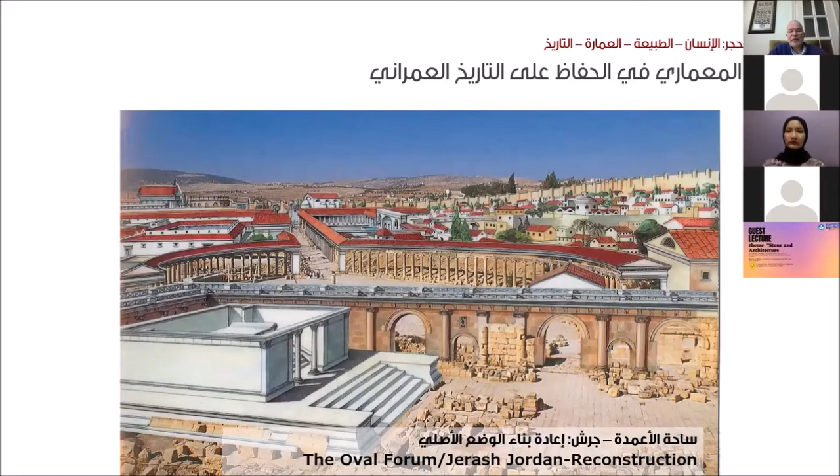Very important examples in our area also come from the Mamluk era, the Mamluk state, which is part of Islamic history. The Mamluks took much care in architecture and in stone architecture. They have very fine examples of architecture in Cairo, in Syria, and also in Jerusalem, the capital of Palestine. I'll show some examples.

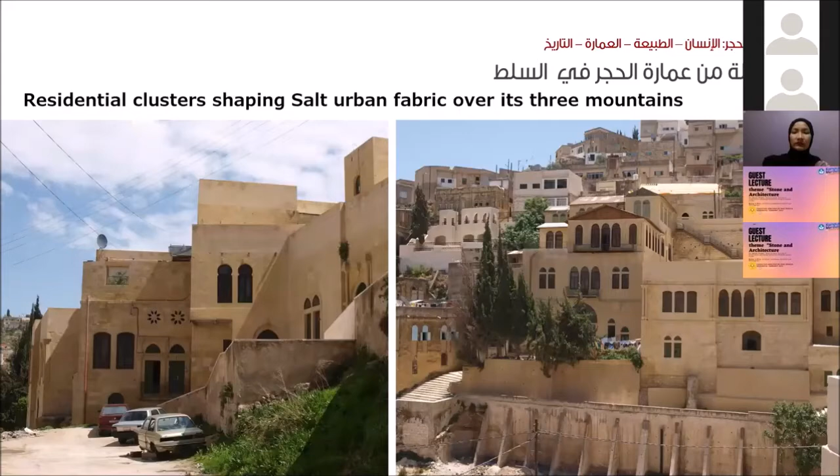Our company has the honor to make a major urban regeneration in the downtown of Salt. The photos that we are seeing are part of that. We have made some conservation efforts for residential complexes, and also, as we can see in some coming slides, there was an open urban plaza where all these complexes looked into. We have made an urban regeneration for that important space, and I will talk shortly about it.

We have another town in northern Jordan. It is Um al-Jimal, the mother of camels, if you want to translate it literally. It used rough details in basalt stone, but very creative.

They could, without of course any concrete or steel or any construction aids, make a span of about 5 to 6 meters with stone only, by putting boulders of stone each one over the other in a creative way, so they could make some cantilevers and some spans resting on arches without using any other elements. A whole town is still there and needs many renovation and conservation efforts, and it is so important.

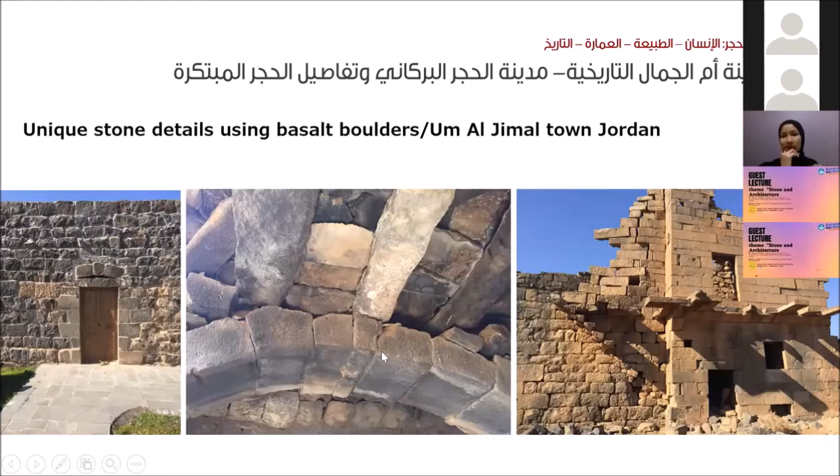In modern Jordan, we can see some photos from Amman, the capital of Jordan. We still, till now, are building with stone, but the techniques have changed drastically from history, because now stone is not the main structural element of the building. It is the cladding, the facing of the architecture, but the impression and the identity of architecture is still developing, stemming from the original concept of using stone.

And as you all know, because stone is part of the environment, it mixes with the greenery, it mixes with the topography, and it conveys the message of the place in a very human and very creative way. So using stone gave architecture in Jordan, and specifically in Amman, a very unique impression and a very beautiful and unified kind of identity. We can see some of the fine stone buildings in Amman.

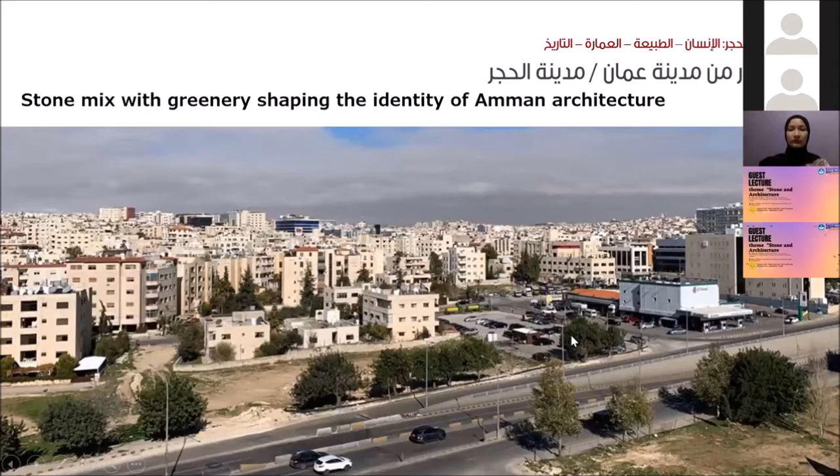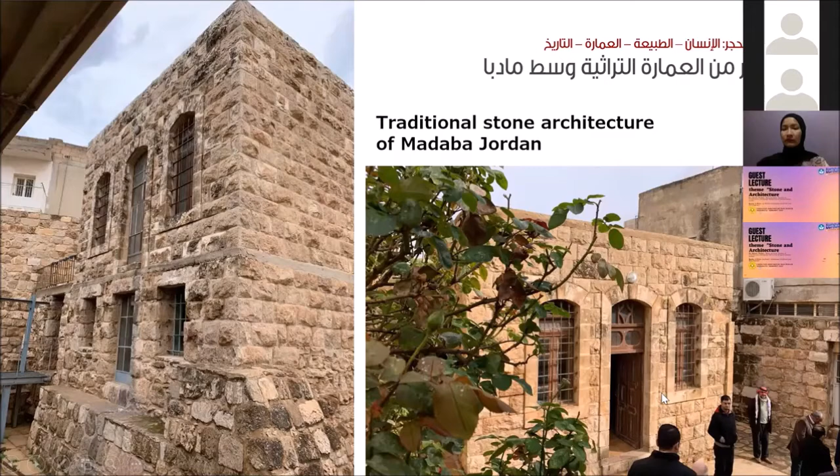Other towns in Jordan also, Madaba is an important city in the middle of Jordan. We have also fine examples of using stone. We have Irbid in the northern of Jordan also, with very fine examples. So anyone who is interested in stone, Jordan is an open museum to stone architecture and stone detailing. You are all welcome to visit Jordan, inshallah, in the near future.

Now, I will talk a little bit about some recent examples of dealing with stone. And after we have finished talking history, now we are talking about the contemporary stone heritage in Amman and Jordan in general.

I will give some examples from other architects and then end with the works that our company has done, and I was part of the team in these projects.

Now, one prominent architect in Jordan is Jafar Tukan. He died about seven years ago. He has very fine projects,

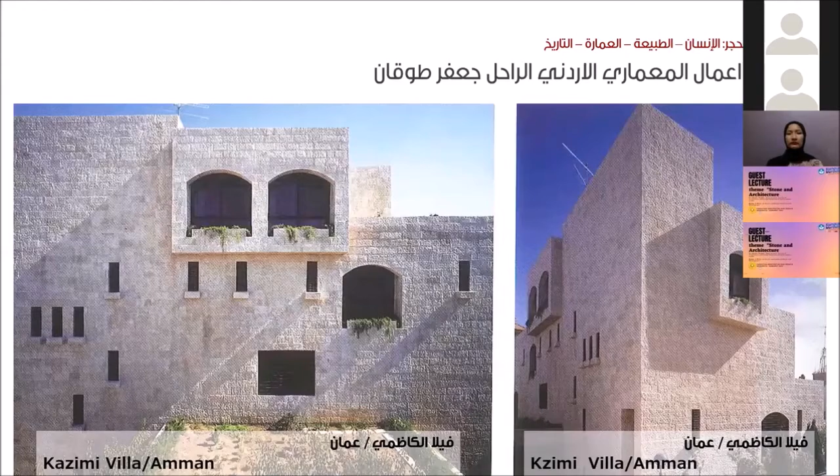Also the Kazimi villa, but from the back side. He has also made some public projects like the City Hall in Amman. As you can see, you have distinctive treatments of stone in each of these projects, and each detail would serve the concept in that project.

This stone comes from Ajloun, from northern Jordan, and he cuts the stone and leaves the natural face outside, so he can get this very nice color and very nice texture in contrast with the concrete elements that he is using for the beams. So as you can see, stone is very tough, but at the same time it is very flexible when it comes to the detail and when it comes to what you want to take out of it.

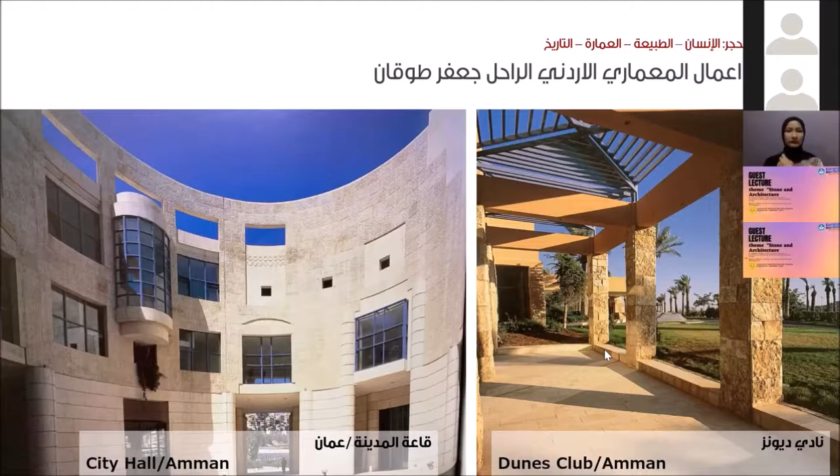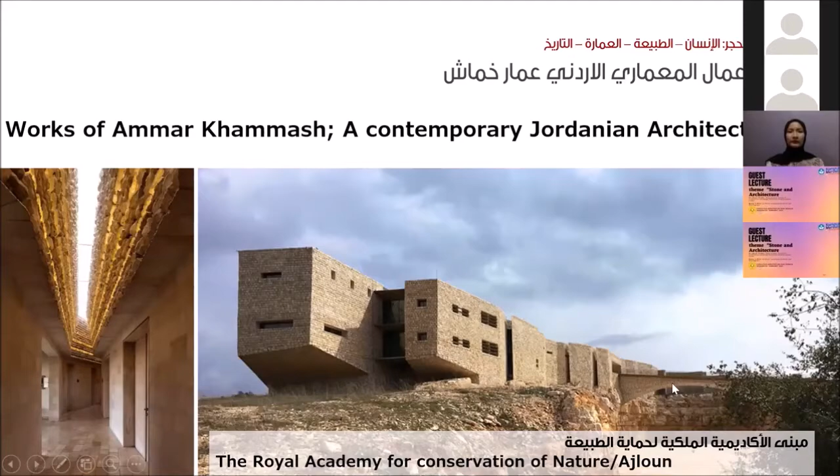But actually, it has very daring details, and he is fond of cantilevers and big spans using slim cross sections of concrete. This is the same, about 35 meters span on a concrete archway cladded with stone. By the way, the stone for this project was quarried from the site itself, an old stone mining site, and he collected all these stones from the same site.

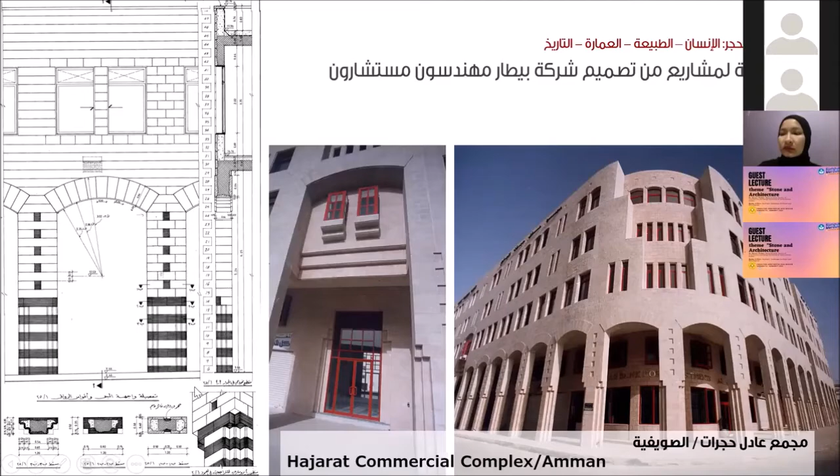These are some of the details that, some 30 years ago, I drew by hand before AutoCAD. This is the same building from inside. It also shows the modern interpretation of the tradition, the stone traditions, but in a modern way.

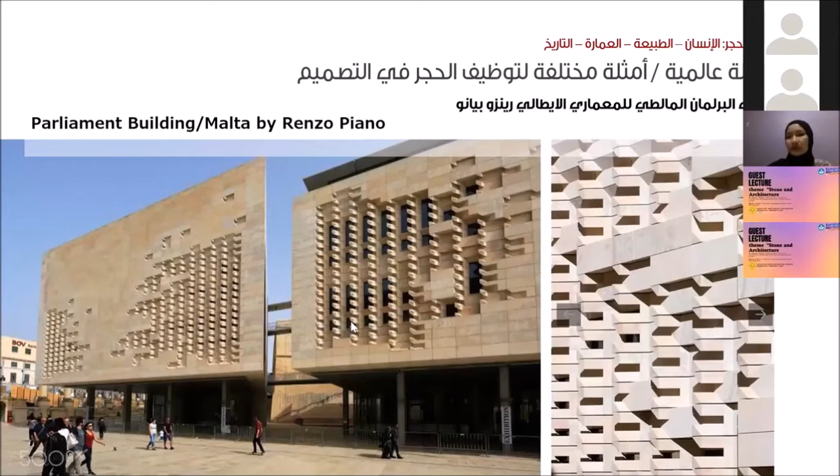An important architect, Renzo Piano, has also made very nice details with stone. This is the Parliament building in Malta by Renzo Piano.

I think we have maybe about 15 minutes. I will try to go more quickly from now on, because these are so specific to Jordan, and I just want to give you a very quick idea about how we deal with the stone.

Of course, the stones are generally of three origins or kinds: igneous rocks, of lava origin, and sedimentary rocks. They originate when the water comes out and the minerals settle, and most of our stones are of this kind. And there are metamorphic rocks, which result from changes in heat and pressure or fluid in the stone.

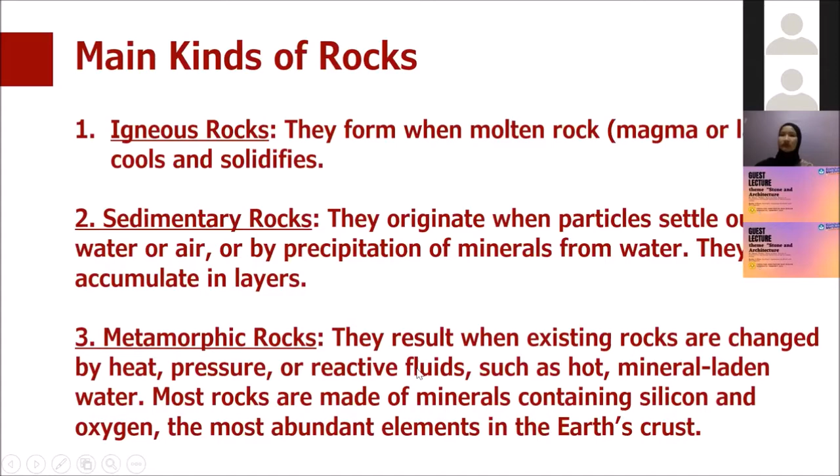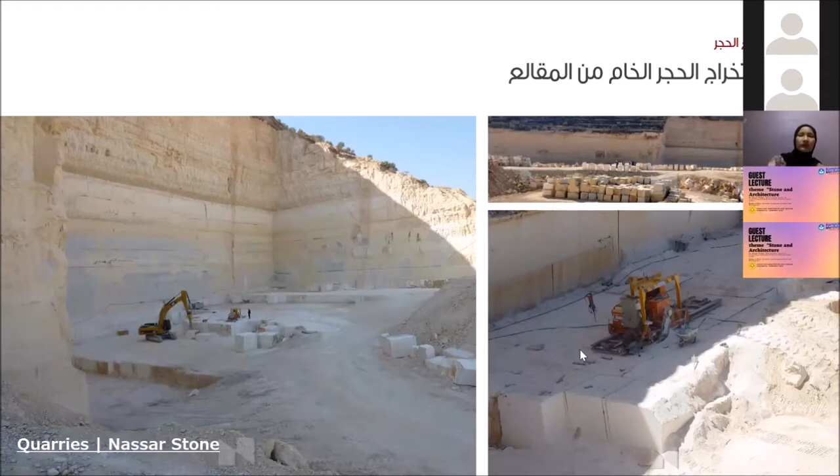I'll go through the mining of stone in different kinds. We have two main ways of mining. From the mining sites like this one, where you cut through the mountains or the grounds and get big boulders of stone. And the other kind is where they pick boulders from the desert, where you have boulders of stone that are scattered, and you pick them and you cut them.

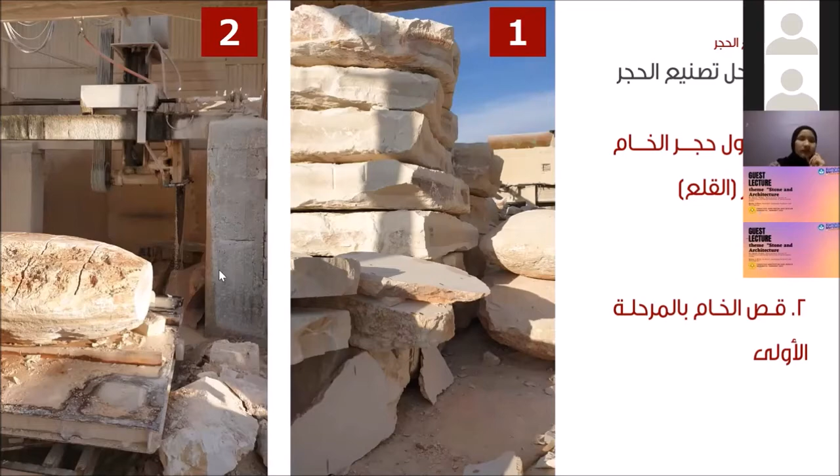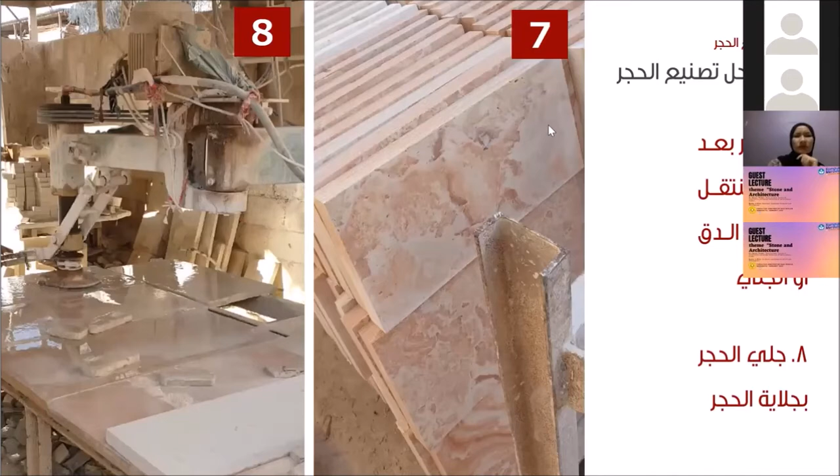For the manufacturing of stone, very quickly, when you get the boulders, you cut into these boulders on different sizes of saws, from bigger to smaller to even smaller, in order to get to the course, to the height of the course of stone that you need. So you cut from big to smaller in order to get at the end to the size that you have in the design. Of course, in the end, they would polish the stone.

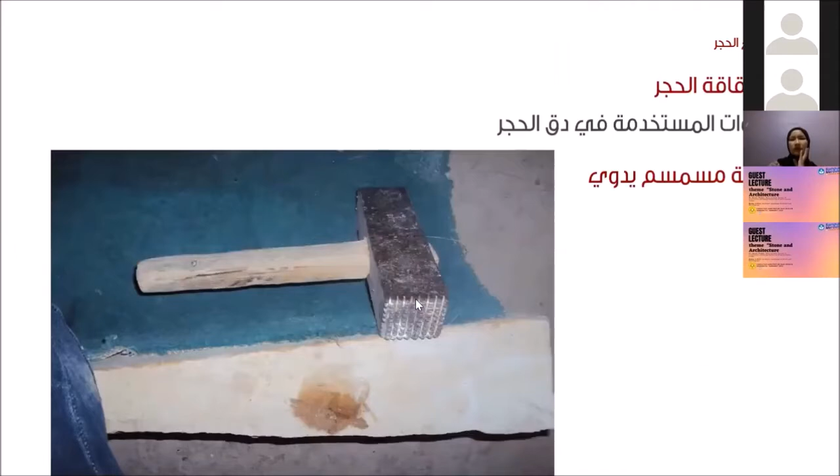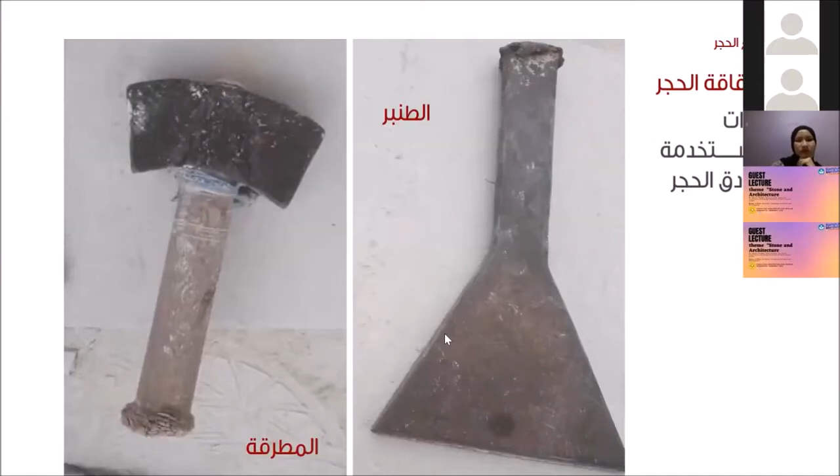Either we can use it polished, or we chisel the face of the stone. In the old days, these kinds of tools were used. Until now, some use the chiseling tools. Nowadays, machinery is taking the place of the manual chiseling of stone. And if the technician is well trained, the result would be very nice.

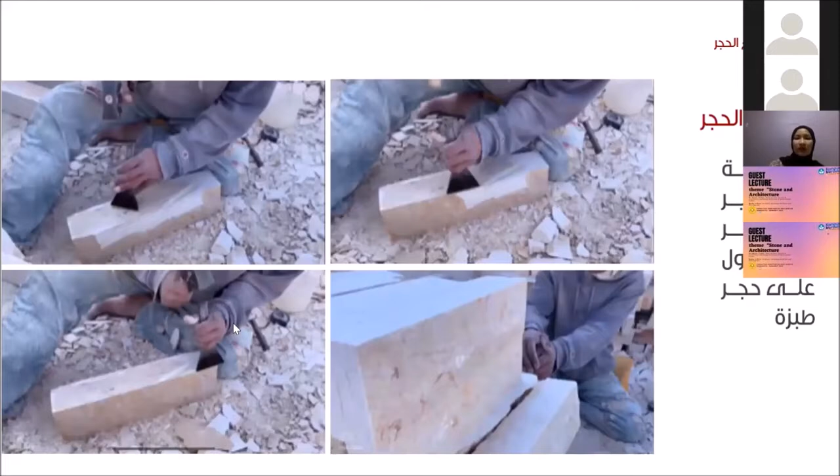These are also some of the tools. For the protruding, or we call it tubze, which is the stone that has a protruding part of it, it should be done by manual tools actually, in order to shape it and have this end result.

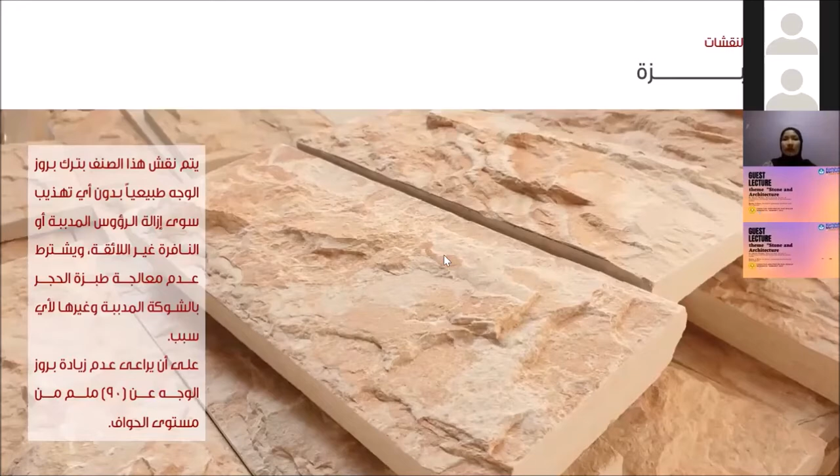I will show some of the textures just quickly. This is the chiseling, we call it musamsam, which is fine. This is the bush hammered, which is very fine, using what we call the matabbe. This is the rough textured.

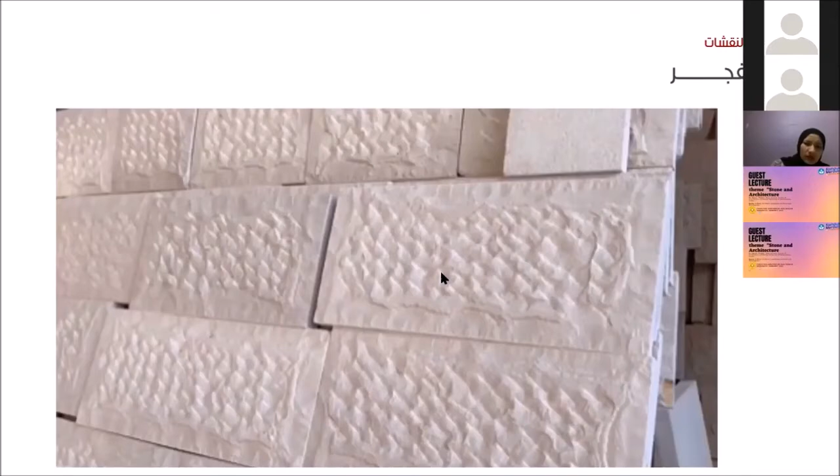Using a one-headed chisel. This is what we call the brushed stone. Some kinds of stone, when you have some veins, the brush can give very nice results, like this one.

This is Jerusalem stone when you brush it. So the veins are being engraved, and the other surface will be very nice, soft, but it has this kind of texture. We have certain names for stones.

We have a very nice tradition of stones actually. So this should be taught in the sites, and it doesn't happen that way. It cannot be fully taught in the universities. You have to go to the workers and listen to them and live with them in order to know all the namings of stone.

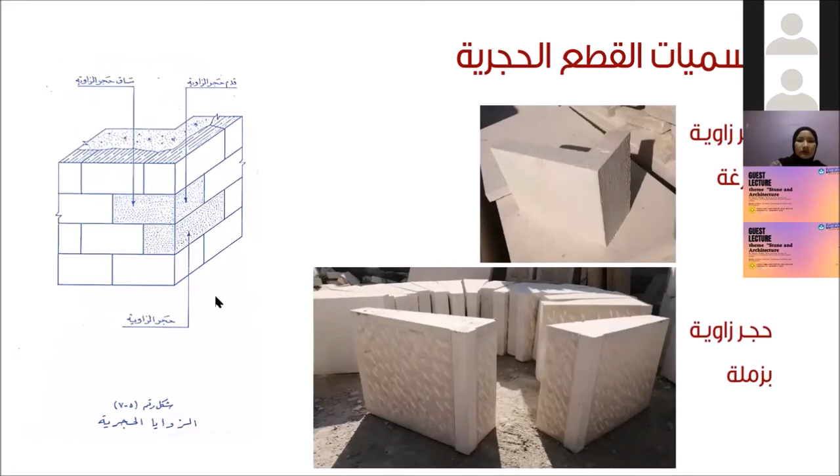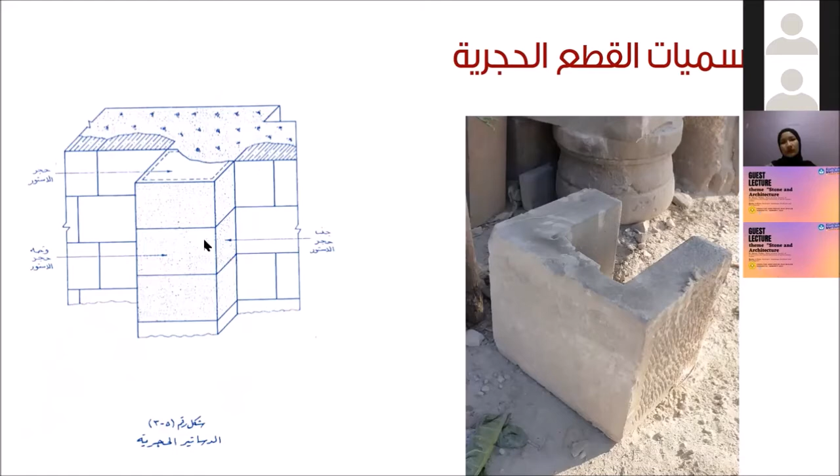This is the running stone, which is the normal shape. The angle stone also has a certain name. The three-faced stone has dustur, we call it dustur. When the angle is more than 90 degrees, we call it roch, also another Arabic name. The small angle, kalb, the larger angle, araqa.

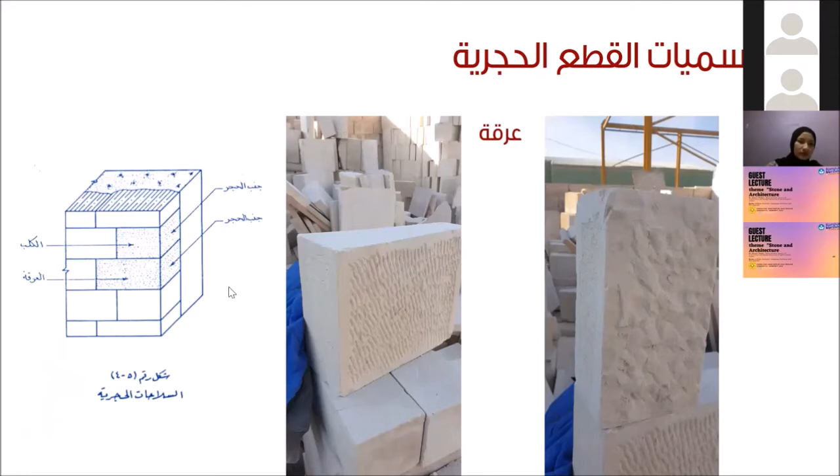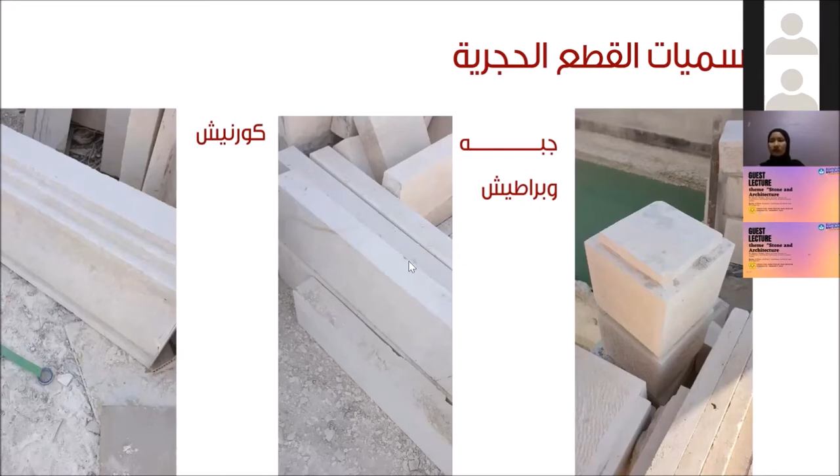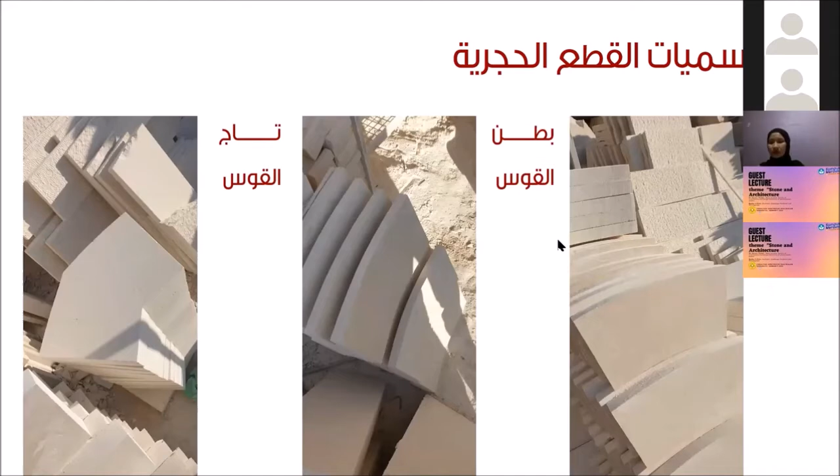The cornices, the square stone for the columns, the overhead stone when you put it on the windows. For the arches, you have also certain naming: the keystone, the soffit of the arch, the face of the arch, of course the carved capitals or bases, or the body of the stone.

Now I will go more quickly because I know we are running out of time. In the old tradition, stone was a bearing material. Even now it could be used as bearing material, but actually the most common use of stone now is just as a facing material.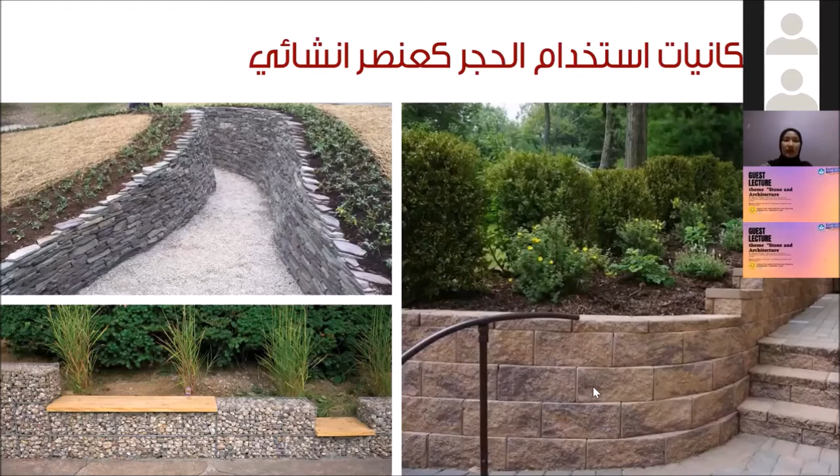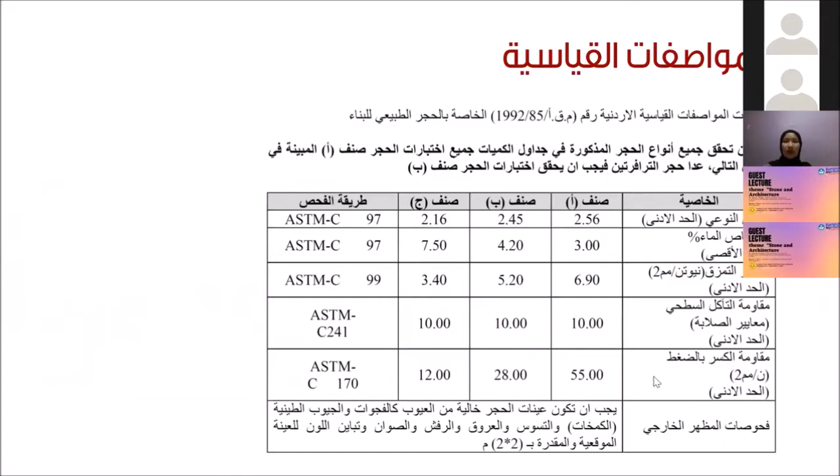In Jordan we have general technical specifications that indicate the proportions, thicknesses, and strengths of the stone. We don't have to go through all of these, but we have specifications for the specific weight, the water absorbance, limits for rupture standards, abrasion—all kinds of tests made on stone to grade it from good to bad.

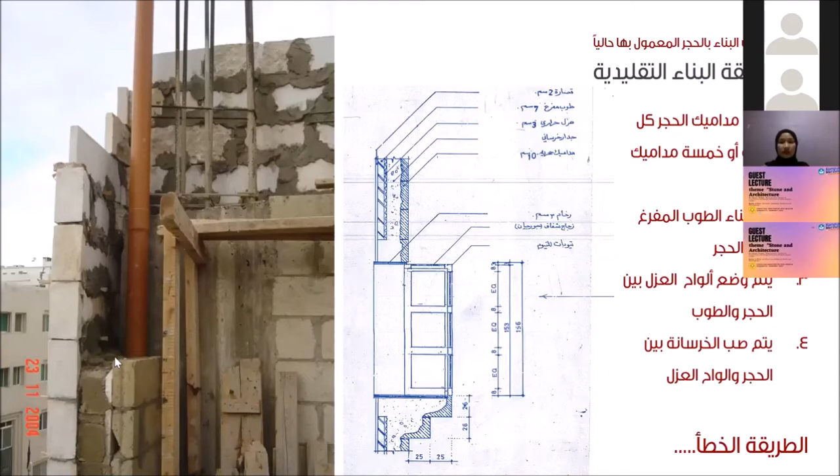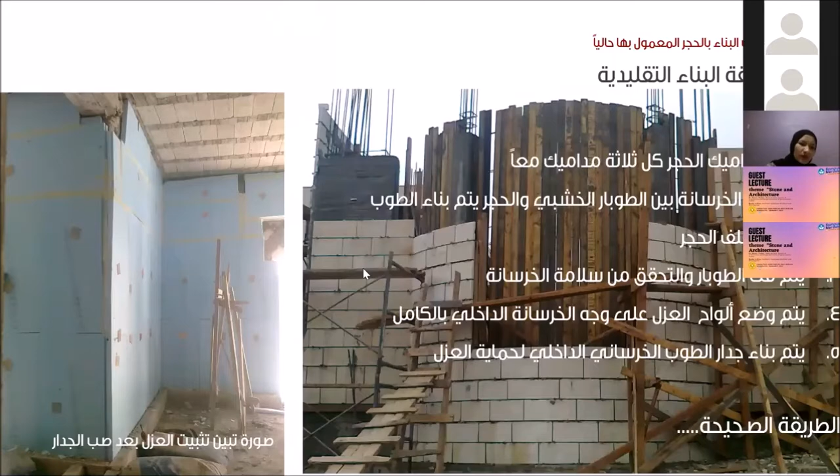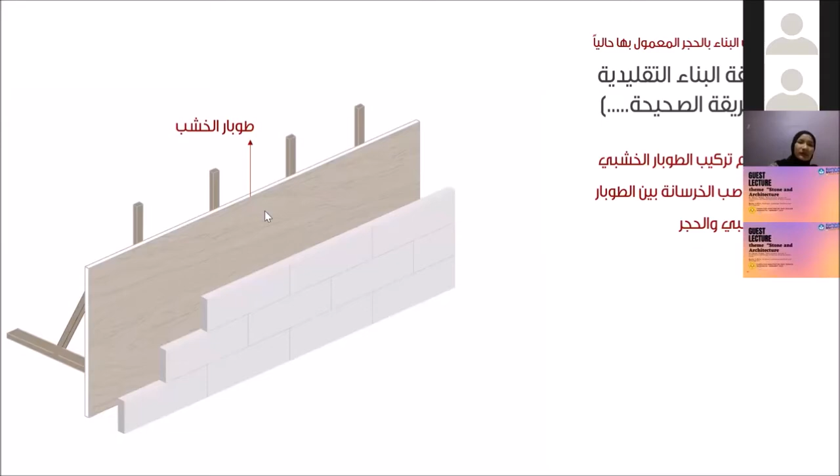Even for cladding systems, we have the traditional system where we build the stones and then pour concrete behind. I will not go through all the details because they are specific to Jordan. The traditional way is to build the stone, put a wood form behind it, pour concrete, then add thermal insulation behind, and build a protection wall from inside. This is the standard traditional way.

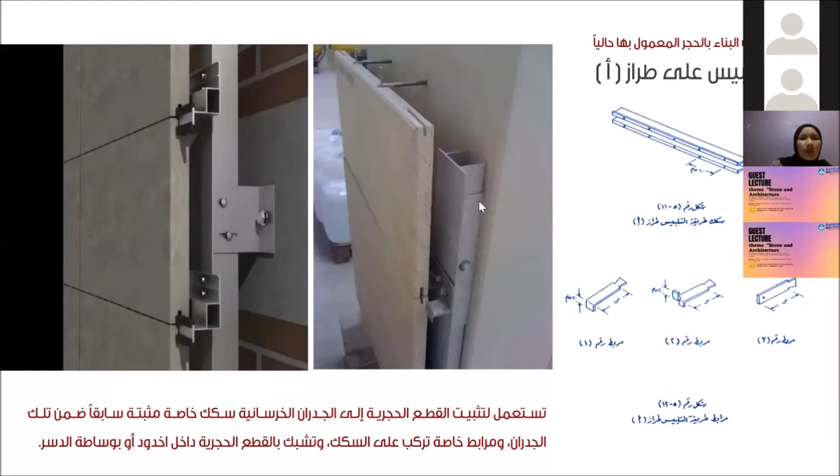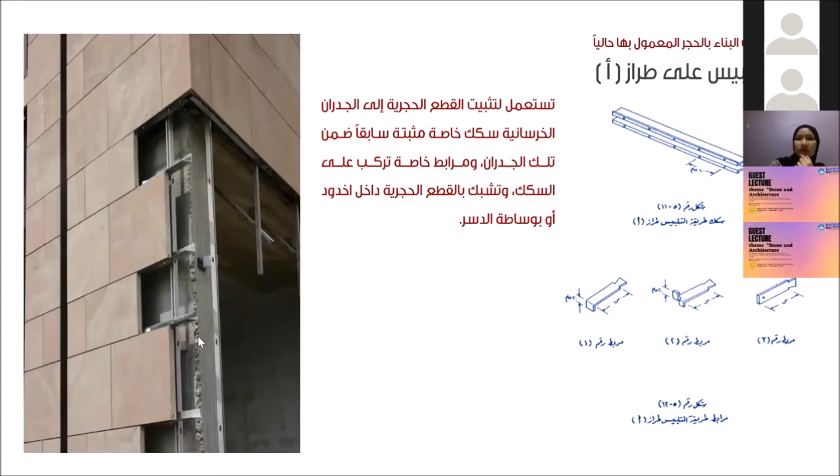But we also have stone cladding systems, sometimes called dry fix or rain screen cladding, where you have a subframe attached to the structural wall, and then you clad over it.

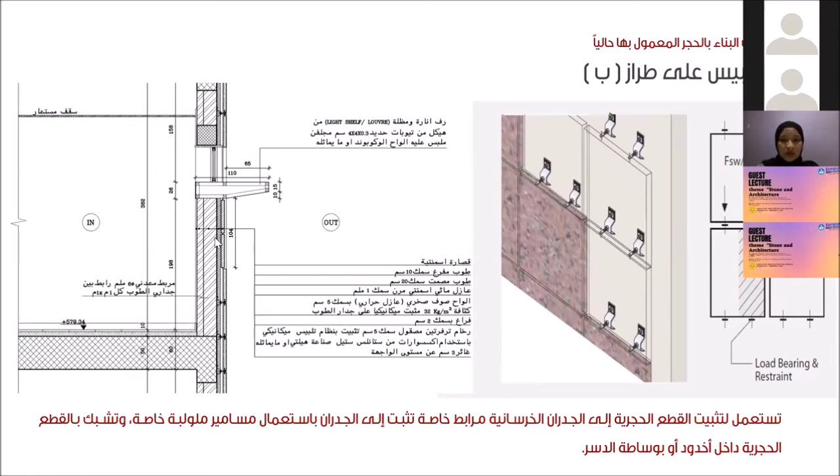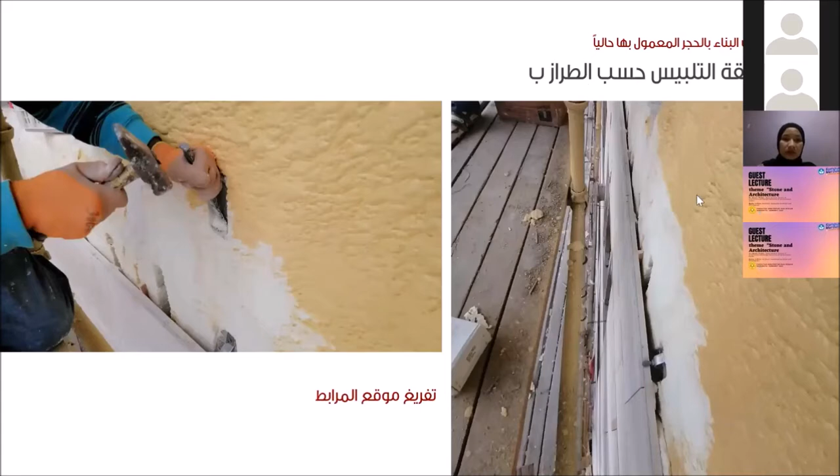We have the more common way of cladding using stainless steel clamps and anchors that you calculate structurally to hold the stones and attach them to the wall of the building. You have to take care of water insulation and thermal insulation within the gap between the stone and the wall. These are some details on how to clad stone—first you put the thermal insulation, and when you cut through it, you have to treat this properly in order not to create thermal bridges.

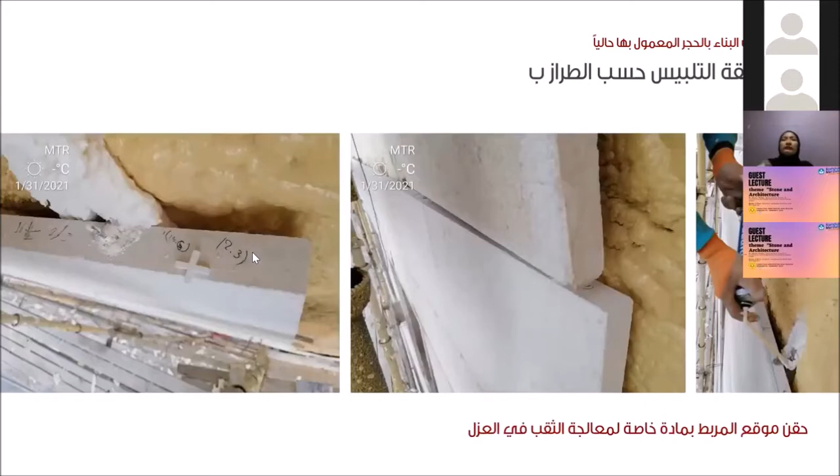These are some construction photos showing how to clad stone over a structure. This is the simplest cladding method, called wet cladding, where we construct the concrete wall, put steel mesh, connect the pieces of stone with clamps to the mesh, and pour concrete behind.

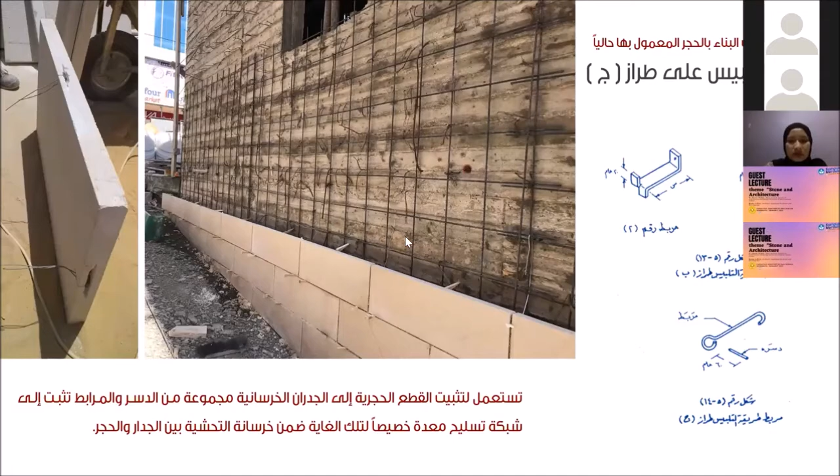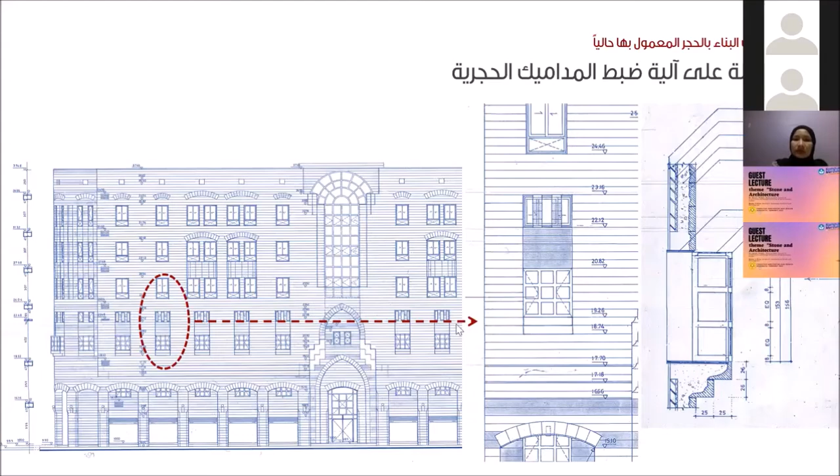Of course, when we design, we take care of the sizes and dimensions of stone from the very beginning. When we design our facades, we make sure the courses of stone match the dimensions from floor to floor, to keep the relation between windows and floors constant across different floors. This depends on each project's cross section and levels, and it's not necessary to have the same course height for the whole building.

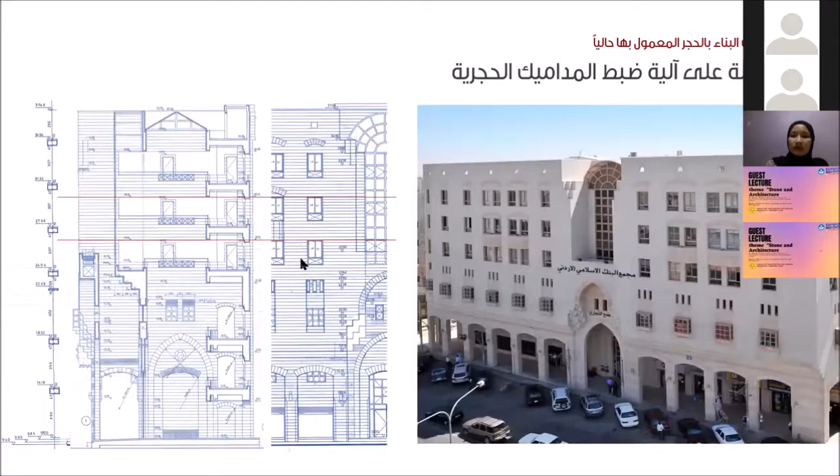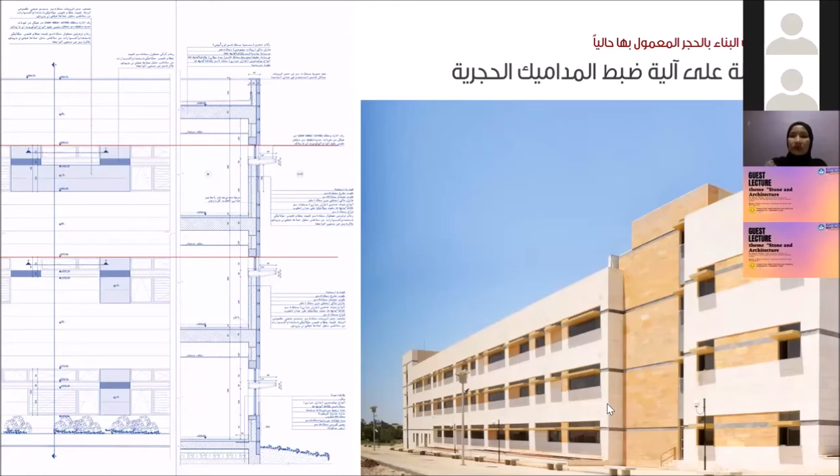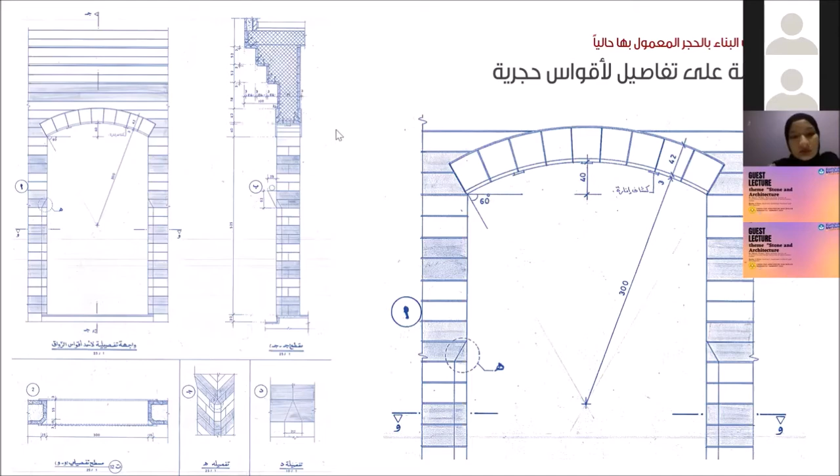It depends on the design—when you have a certain design, you can play with the height of the courses according to your preference. These are some examples of modern detailing in stone. As I said, stone is no longer a structurally bearing material; it is now a cladding material. So we now depend on reinforced concrete cross sections and attach stone to the concrete.

The pointing of the stone at the end is also a technique related to stone, where you put grout within the joints of the stone, and treat that joint. It has different kinds of treatments.

When we prepare our tenders and bills of quantities, we should describe in great detail how we treat this item—where to get the stone, what treatment you want, how to calculate the quantity, how to set the price, what tests you have to do, and the specific way of cladding or traditionally building stone. All of this has to be described in elaborate detail, in order not to create misunderstanding between the engineer and the contractor.

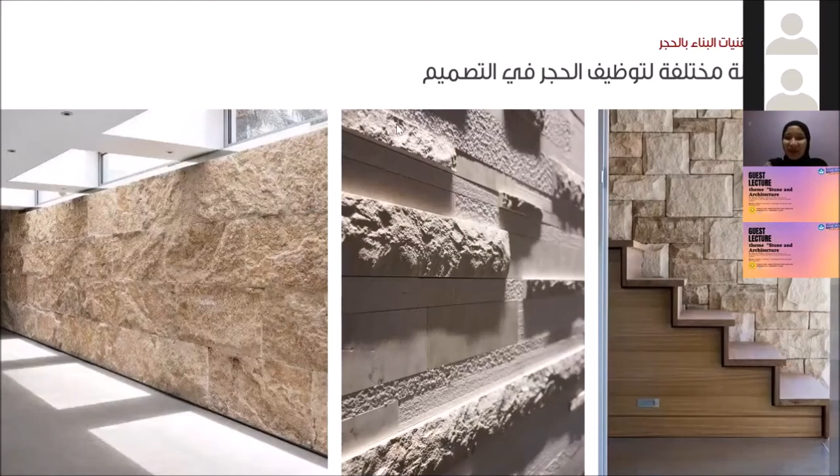Okay, thank you so much for the presentation. I think it's wonderful—it's okay that you went over time, because the presentation was very wonderful and insightful. I think so many people wanted to hear it, because there are so many differences in architecture techniques and perspective due to the difference in material usage between Jordan and Indonesia. But now we can get into the discussion session. Before I begin, let me read some of the questions.

I forgot to mention earlier that Bapak Nashar is unfortunately unable to give his presentation today due to his health situation.